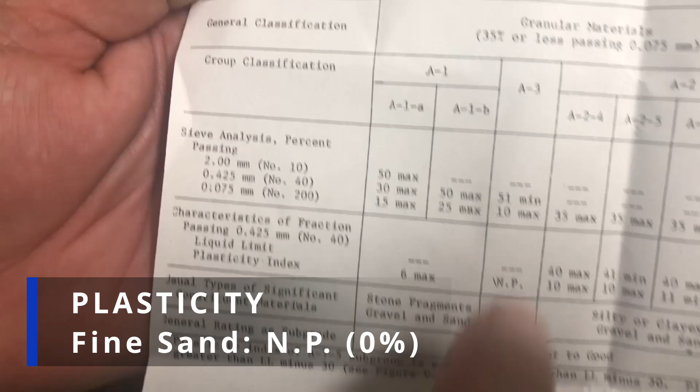Certified labs gave it an AASHTO rating of non-plastic with 0% plasticity, meaning it has zero cohesion and absolutely no structural integrity. Engineers reject this material by default. It's considered completely unusable. The old way accepts the verdict. The new way puts it to the test.

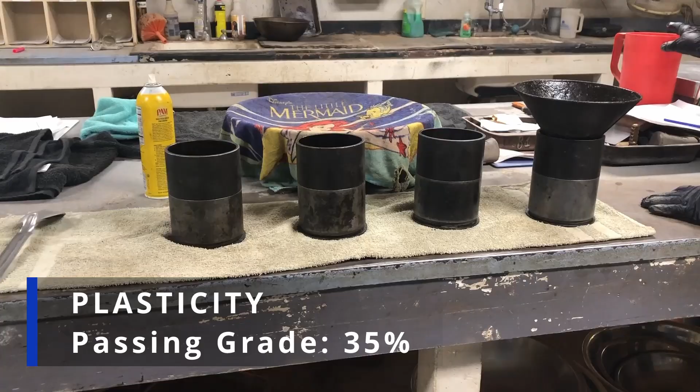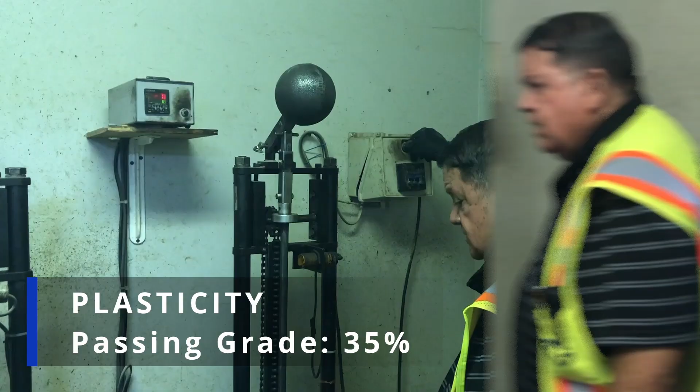We treated the sand with In Place and put it to the industry standard Marshall test, which measures a material's resistance to heavy loads. The minimum passing threshold for road base qualification is a score of 35. This unusable sand tested at 38 after treatment. A material with zero inherent structural value now exceeds the standard for road construction.

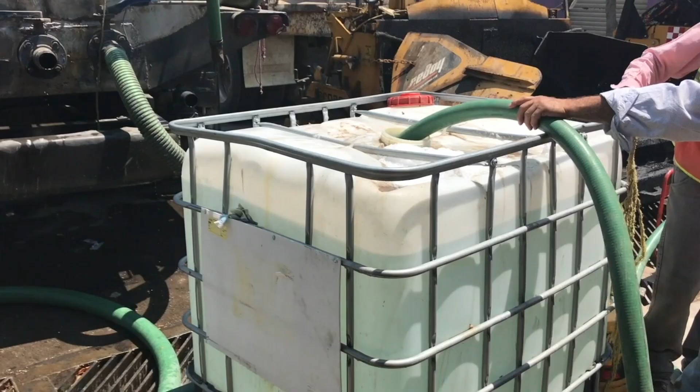Most soil problems are actually molecular problems. The particles will not bond together, so the ground will not hold a load. In Place BaseGrade solves that at the source. Its macromolecular formula permanently cross-links soil particles, transforming any native material into a cohesive, load-bearing structural base.

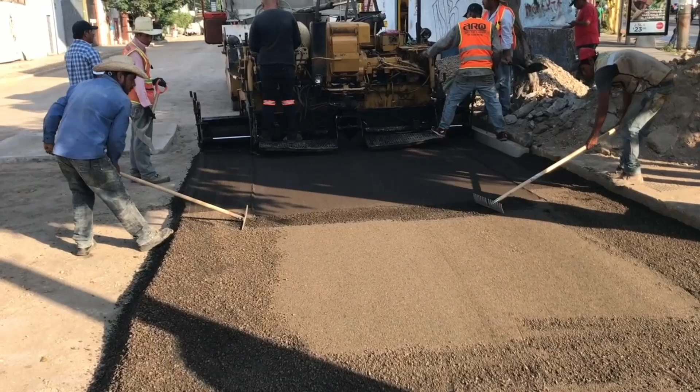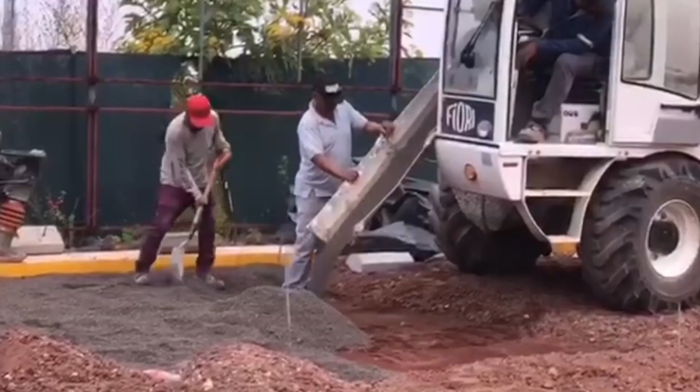It works with any soil type and any existing material already on site, including native soils, recycled asphalt millings, and mixed aggregates. No excavation, no imported fill, no specialty equipment, no heat. What was previously considered unusable ground became the foundation itself.

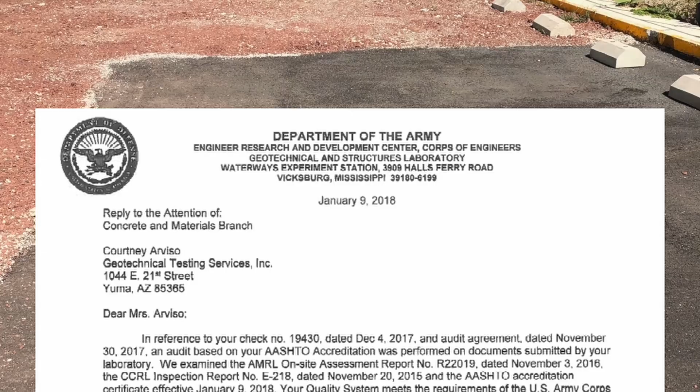Those results are not a demonstration in isolation. They are verified by laboratories holding AASHTO accreditations and U.S. Army Corps of Engineers qualifications, the exact standards used by state Departments of Transportation.

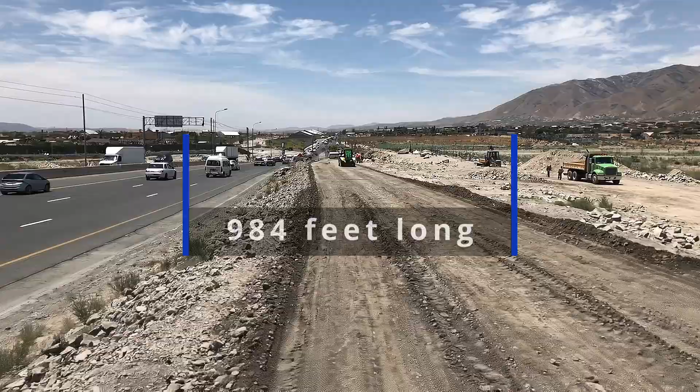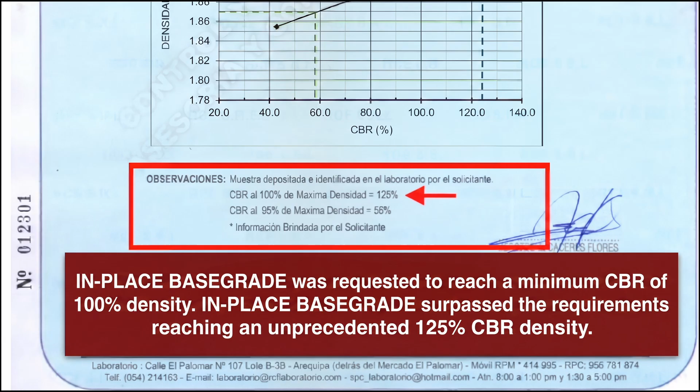In Cerro Colorado, Peru, a test road was treated just 4 inches deep. The project required a passing grade on the worldwide standard engineers use to certify whether ground can actually bear heavy traffic loads over time. That standard is called CBR, and a score of 100% is a demanding threshold. After treatment, the subbase reached an unprecedented 125% CBR.

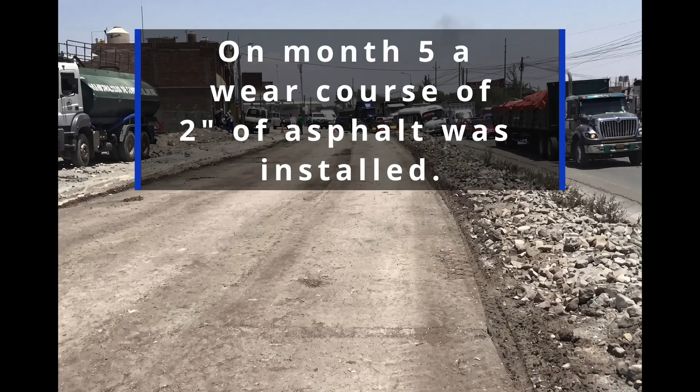Then came the real test. The treated base was left completely exposed for 5 months of Peru's torrential rainy season with no asphalt or cover of any kind. After those 5 months of exposure, a 2-inch wear course of asphalt was finally installed. 1 year later, it was carrying over 4,000 vehicles a day through seasonal flooding. 5 years later, we went back.

Just 30 feet away, an untreated section of the very same road tells the full story of foundation failure. Extensive pattern cracking, deep recurring potholes, the same climate, the same traffic, the same environment. The only variable was what was done below the surface.

We walked the entire treated section looking for the worst damage we could find. What we found was this: a single superficial crack in the top asphalt layer. No structural deterioration, no reflection cracking from below. The foundation underneath remains perfectly intact.

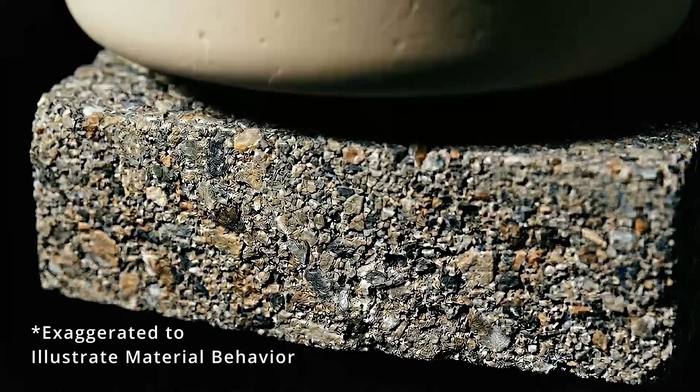The old way creates strength through rigidity. It forms a brittle matrix. When the ground shifts, it fractures, and those cracks reflect right up to the surface. In Place does it differently. Rather than locking the soil into brittle structures, it binds the particles together in a way that allows the ground to absorb a load and return to form.

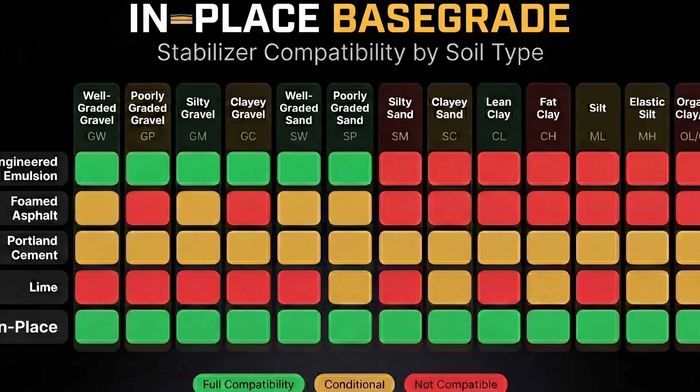When compared to all other products on the market, In Place builds a structural base from any soil type, without the strict application restrictions and material limitations that hold the old way back. To understand why this matters, you have to look at how roads actually fail. 78% of road failures originate in the foundation, not the surface.

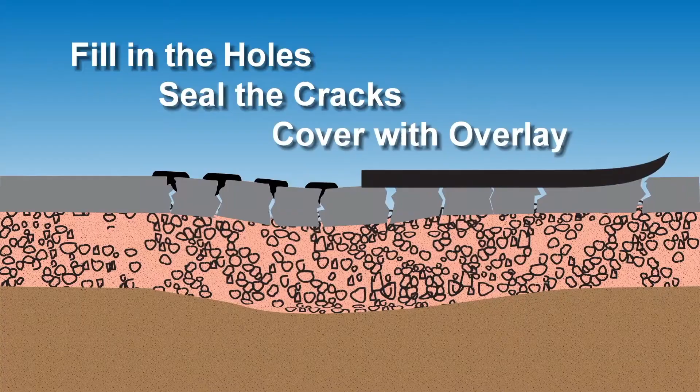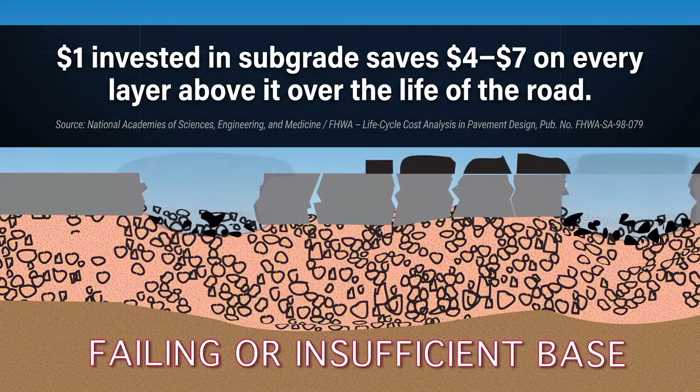Every time a vehicle passes over, an insufficient base deflects, the surface above cracks, so crews patch it or apply an overlay. But because the repair never fixes the weak foundation, the base deflects again. The patch fails, and the road continuously gets worse. You cannot fix a foundation problem from the surface down. Every dollar invested in the subgrade saves $4 to $7 across every layer above it over the lifespan of the road.

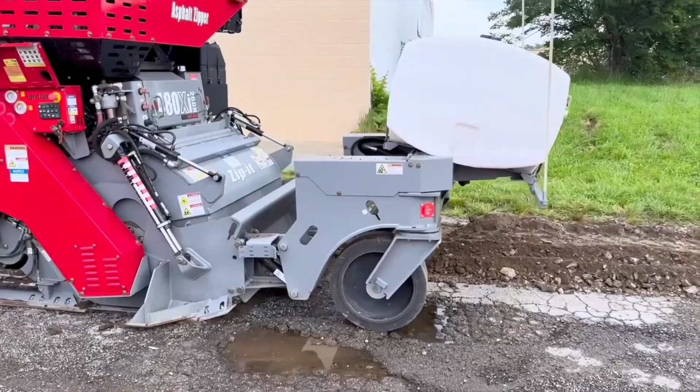Let's look at an example with full-depth reclamation. Here, we see a completely failed road. The existing asphalt is broken up. It's milled down. The broken surface and underlying soil are mixed together into a single homogeneous blend. That blend is then sprayed with In Place. The solution penetrates the material. The treated blend is graded to spec and then compacted.

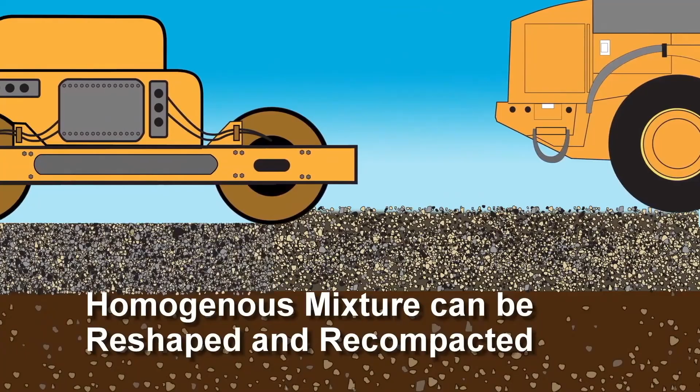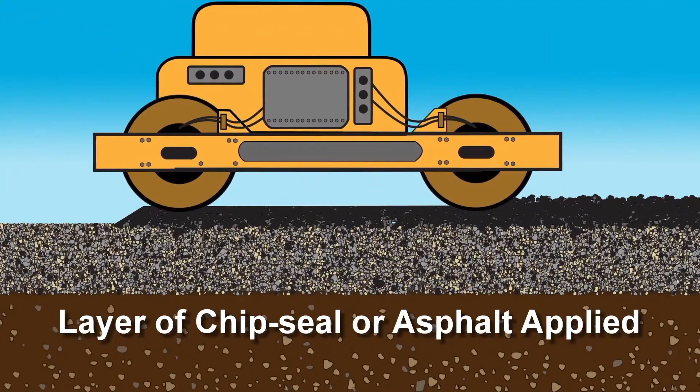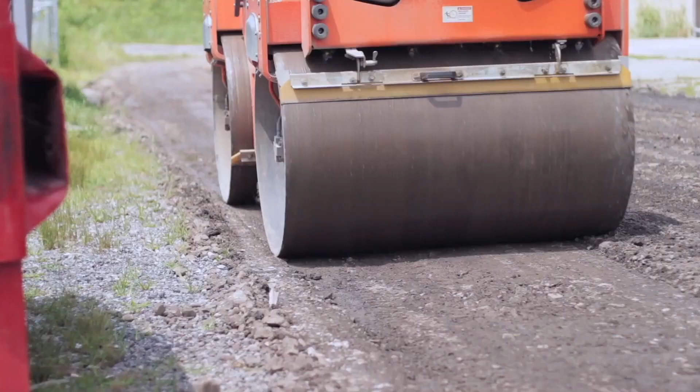Within 24 hours, this base is ready for a wear course. If your road was never paved to begin with, the same equipment and the same process requires fewer steps, not more. There is no failed surface to reclaim. You treat the native soil that is already there, graded and compacted. Same result, simpler execution. And because the foundation is now genuinely load-bearing, the wear course above it can be dramatically thinner. For local and rural roads, chip seal alone is often sufficient.

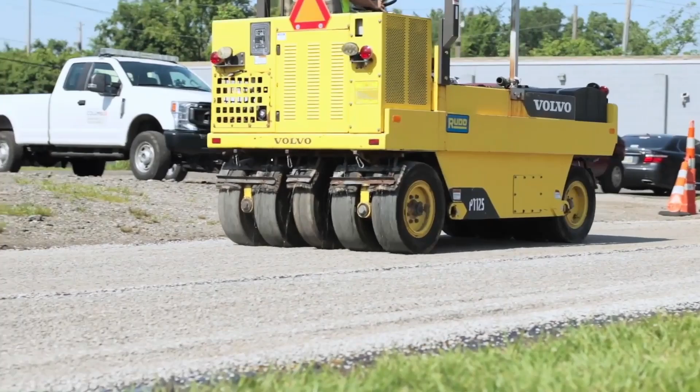Where asphalt is required, a road that previously needed 4 inches can now be built with as little as 1.5 inches. That's not a minor material savings. Across a county road program or a multi-mile rural project, that reduction in asphalt thickness changes the entire economics of the job. The same principle applies at the other end of the spectrum.

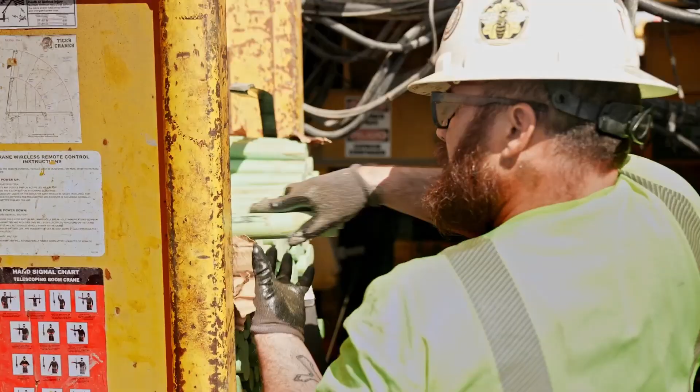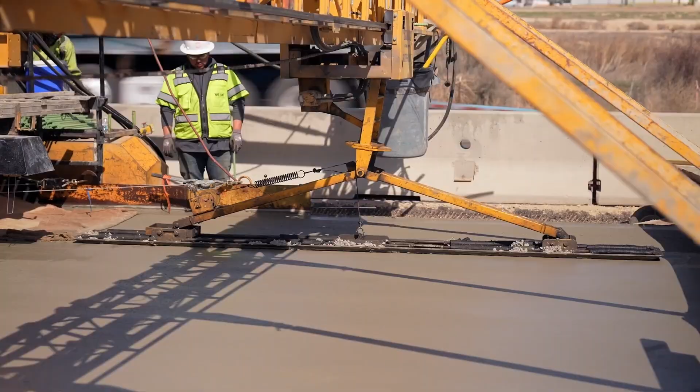On major highway and interstate construction, a treated base behaves like a rigid platform rather than a flexible slab. That changes the structural math for everything above it. Engineers can specify less rebar, thinner concrete, and a reduced wear course. In Place applied to the base course is what makes the recalculation possible, and the savings compound across every layer above.

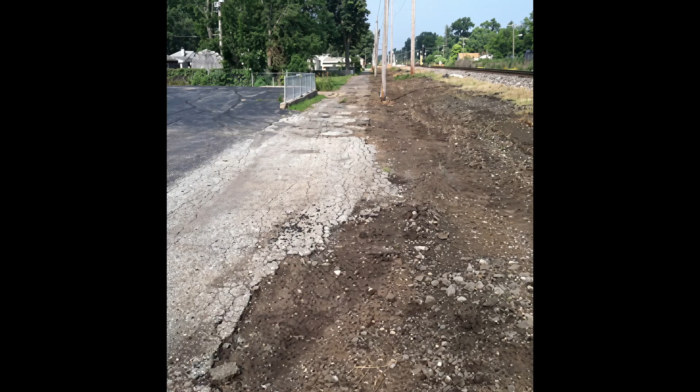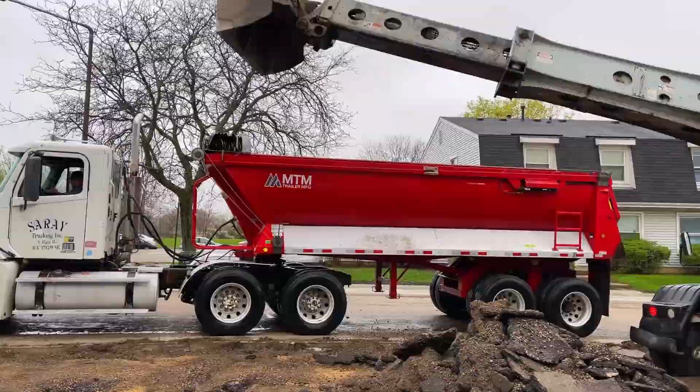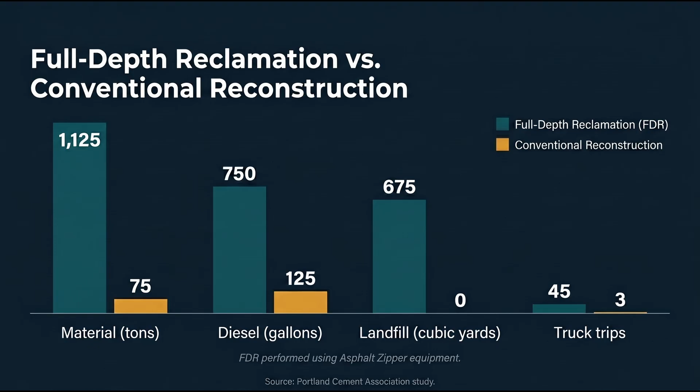In South Bend, Indiana, a 1-mile reclamation project using this exact process was ready for chip seal within 24 hours of treatment. The entire project, start to finish, was complete in 2 days. The old way means excavating the failed base, hauling it out, sourcing and transporting premium aggregates, and rebuilding from the ground up. Specialty contractors and asphalt plants, hot mix logistics, weeks of road closure, aggregate haul trucks creating liability on public roads. The new way means the road crew already on site finishes in 2 days, using the material already there with equipment they already have.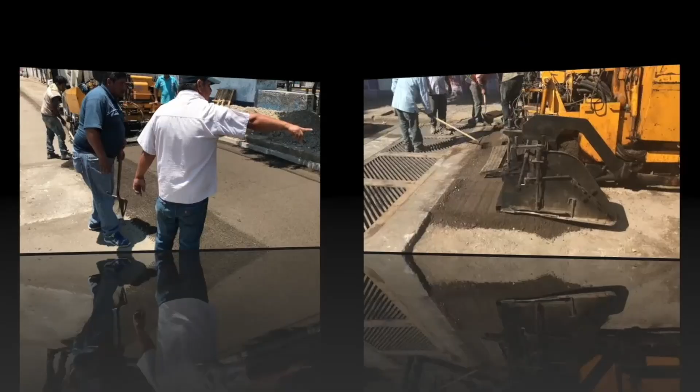This brings us to a critical distinction. The failure cycle that drives conventional maintenance costs is addressed at the source. Second, when that road eventually does need attention, the base can be reclaimed and retreated using the material already on site. No excavation, no imported aggregate, no landfill. The same crew, the same equipment, the same process, rebuilt in place. Your road is no longer a depreciating asset requiring periodic replacement. It's a renewable infrastructure system, and the ground it is built on never leaves the site.

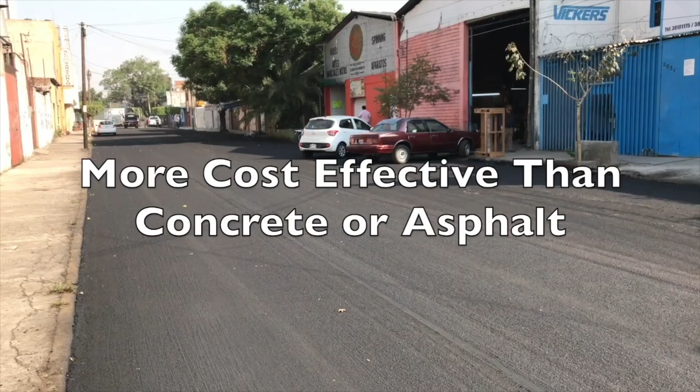In Place carries a 0 VOC rating. In practical terms, that means no hazmat protocols, no regulatory flags, and no site restrictions based on chemical exposure. You can handle it barehanded in the field. It cleans up with water. The ecological testing goes further than most products in this category, with independent laboratory testing confirming it is safe for aquatic species, safe for soil ecology, and safe for groundwater. It meets and exceeds standard environmental thresholds at every level of testing. Other products in this space do not have that record.

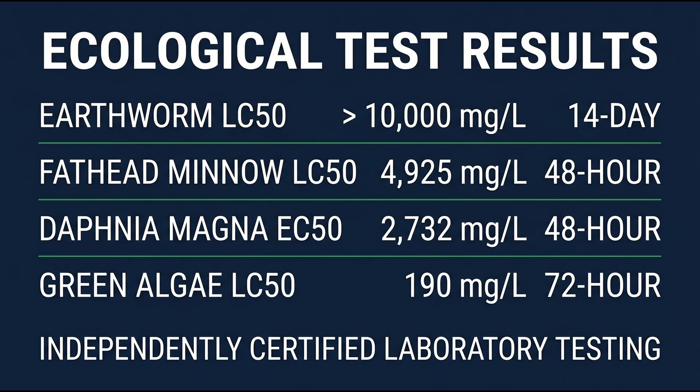Now, look at this project in Prescott, Arizona. In Place was cold applied with 0 specialty equipment, and workers applied it in normal field clothing. That road has recorded 0 maintenance for 18 years. Not reduced maintenance, but none. Here in this AASHTO certified lab, you can see In Place diluted at a 1:4 ratio with water and mixed until the solution turns cloudy, which confirms full dispersion of the formula.

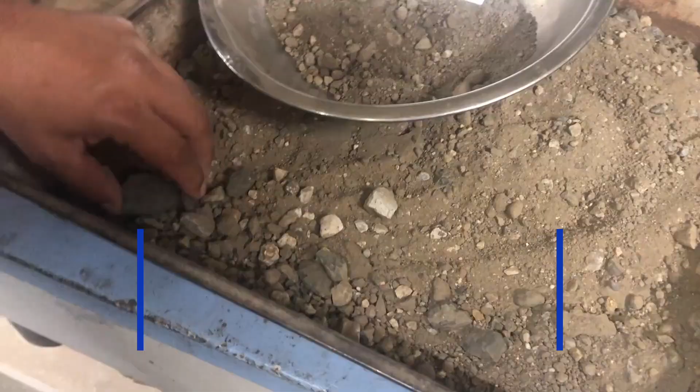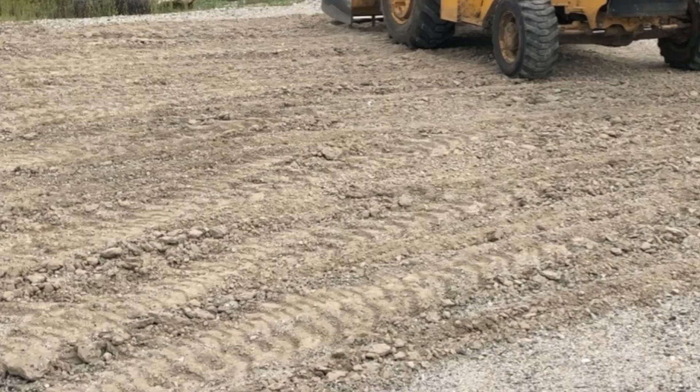At Magic Mountain, California, the project used ABC aggregate, a mixed soil type that can be problematic for conventional stabilizers. The project utilized 100% existing on-site material. A single 250-gallon tote was mixed directly into a standard water truck. The ground was scarified. The In Place solution was sprayed onto the scarified surface. The soils were blended with equipment already on hand. The base was then compacted to 98% density. The leftover solution was then sprayed superficially for dust control.

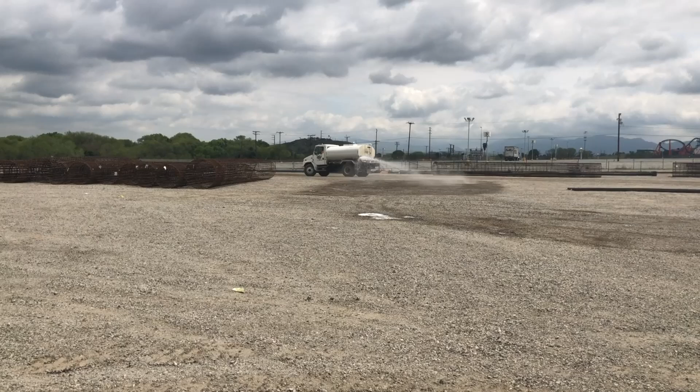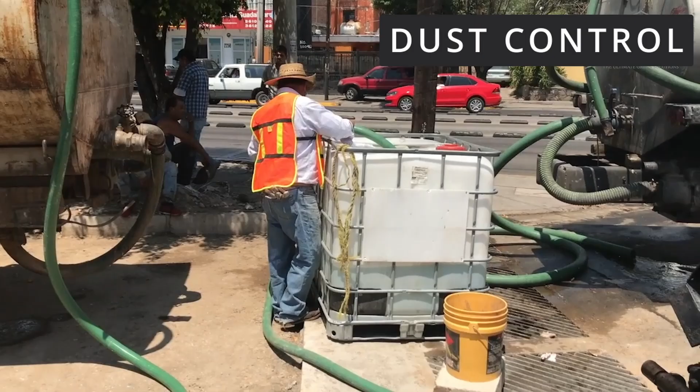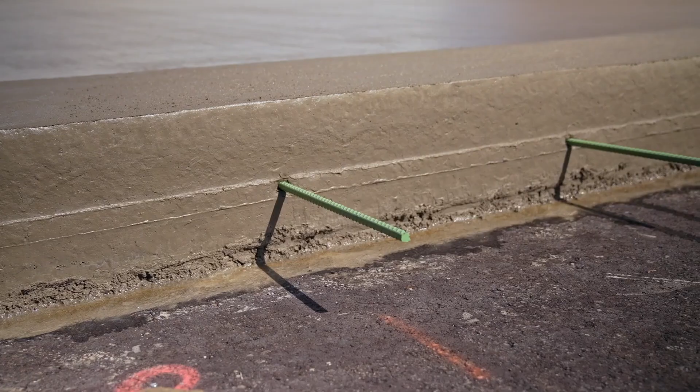In Place BaseGrade changes the equation at every level. Roads are built faster, last longer, and cost less. Projects previously prevented by poor soil conditions can now be built. This is not an incremental improvement on the old way, and it does not require learning new skills or bringing in new equipment. The crews and machinery already on site do the work, with less labor, less equipment, and less complexity than the conventional approach. The crews are safer, the surrounding environment is safer, and the roads they build perform better and longer for the communities that depend on them.